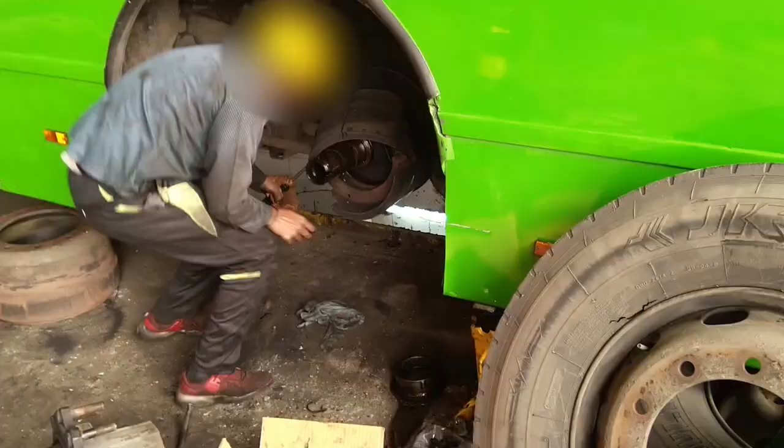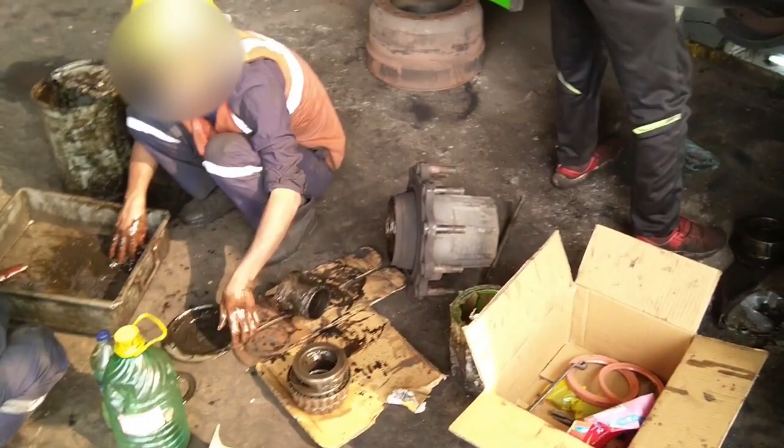Fully floating axle is used in Tata Marco Polo DTC CNG low-floor bus. This type of axle is also used in many heavy-duty trucks. Fully floating axles are preferred in high-torque, high-load applications.

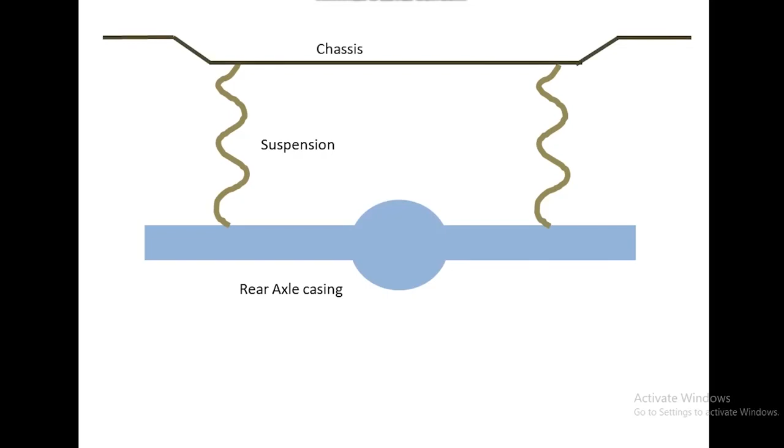Rear axle casing, or we can say axle housing. Axle housing, which is directly connected to the suspension. Chassis. Sun gears and star gears of differential. Bearing hub, having taper roller bearing pair. Lock ring, for securing the position of bearing.

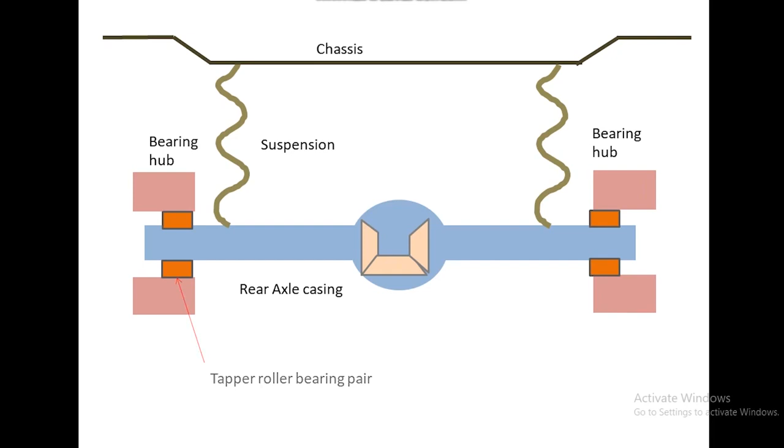Stub axle, having spline connection with sun gear and hub, therefore it transmits torque from sun gear to hub, and finally to wheel. Cover plate, it is also called dust plate.

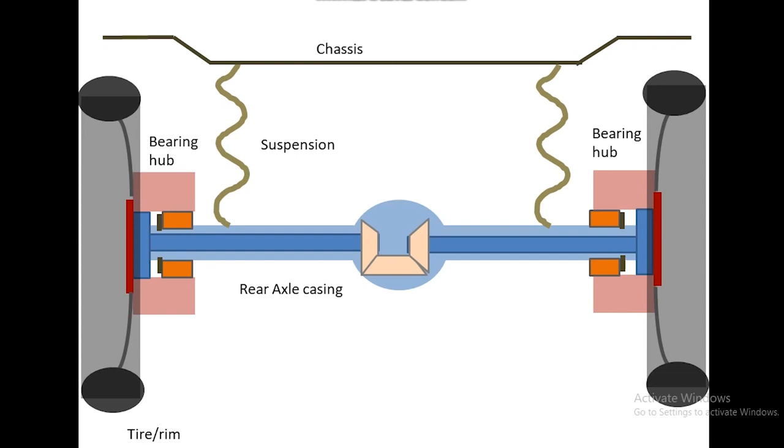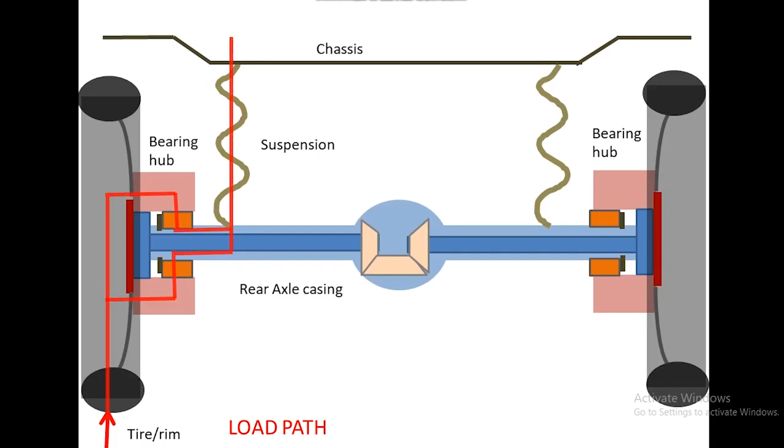The drive wheel is carried on the outer end of the axle housing by a pair of tapered roller bearings. The reaction load is transferred through the bearing hub to the axle casing, then to the suspension. In this way, the axle casing takes the full weight of the vehicle and absorbs all bending stress.

Stub axle transmits only torque from differential sun gear to the wheel or bearing hub. Therefore it undergoes only torsion. Let's take a closer look at the bearing hub.

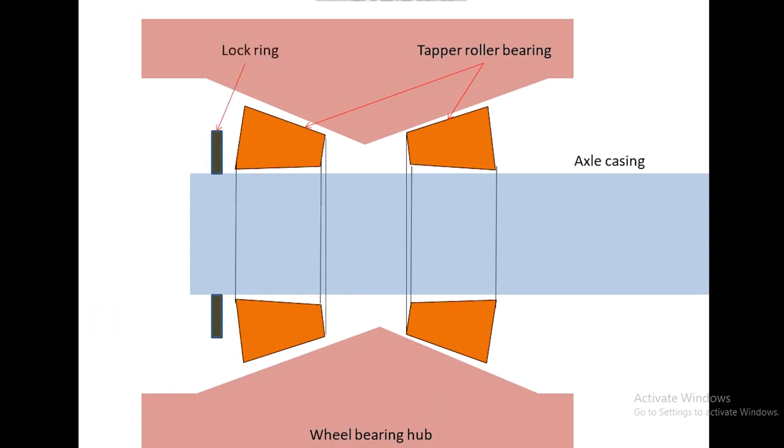The tapered roller bearing arrangements are designed to handle both radial and axial loads caused by turning, skidding, and pulling. Stub axle is coupled with the bearing hub with spline connection, so that both are free to move relatively in axial direction, and transmit torque to the wheel, which is bolted to the bearing hub.

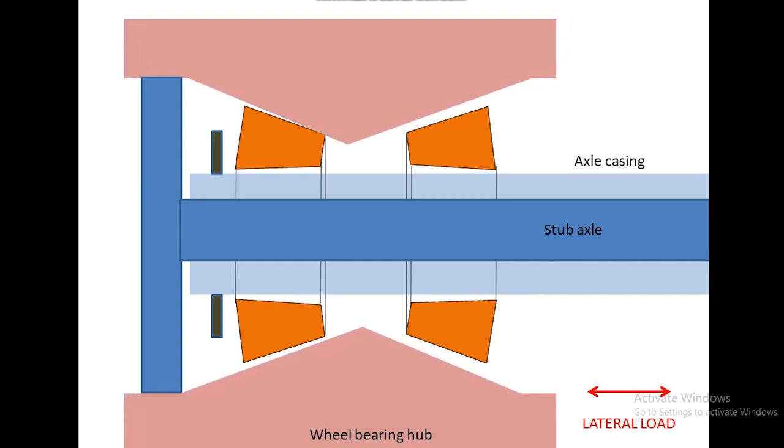Therefore we can say that, in case of fully floating axle, stub axle shaft is only subjected to torsional load and shear force can be considered negligible, based on the fact that the bearing and axle casing primarily carry the weight of the vehicle.